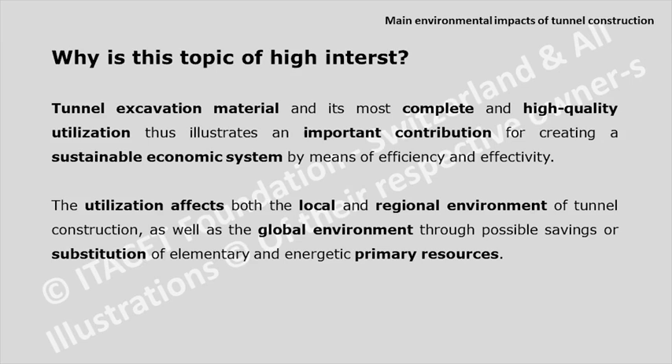Tunnel excavation material in its most complete and high-quality utilization represents an important contribution to a sustainable economic system by means of efficiency and also effectiveness. The utilization affects both the local and regional environment, but also the global environment. Of course, we could try to reuse most of the material on site, but it's not always possible. But we should try to reuse the materials for the industry as close as possible, or on the construction site, and thus substitute other primary resources which we have to dig for in mining, for producing, for example, the concrete on the construction site.

Construction engineering, by the way, is the most important sector with regard to economy and ecology. It has a substantial part in the GDP of the countries. Its contribution to the global warming potential is about 1/3. It requires about 40% of the global energy, and it contributes to the waste stream with about 50%. So these are quite high numbers. It's just the construction industry.

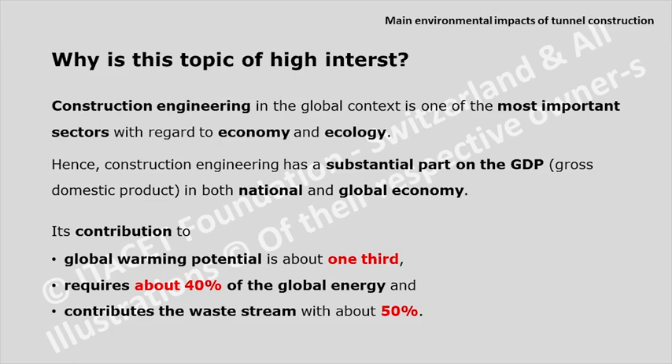What I would like to show you is some important worldwide developments, and I start with the population. You see, in 1750, we were not even 1 billion, now we are more than 6. Water use, we have the numbers from the 1900s to the year 2000. You see a multiplication by several factors in the water use. Let's see the urban population.

What we see in all Europe, maybe also here in South America, is that the urban population rises and leaves the countryside, which ends up in really difficult situations in the cities, because we have pretty small cities. Our biggest city is Vienna with about 1.8 million, but it gets 100,000 people every year, and the infrastructure is not prepared for that. And all the other cities have the same problem. Paper consumption is just one other example, or restaurants. The number of restaurants is rising a lot worldwide, as you see.

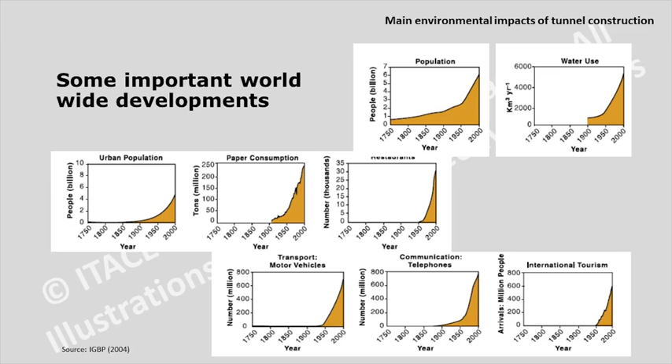Transport, motor vehicles: the numbers start in 1950 and go to the year 2000. You see the rise in these motor vehicles. They all need energy, of course. They all need primary resources. Or, for example, communication, the telephones, the mobiles. Everybody has a mobile nowadays. International tourism has risen dramatically, and thus needs a lot of energy. This ends up in a global warming potential.

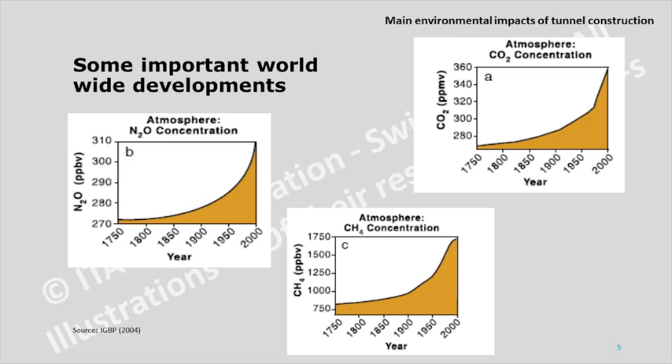With all of these developments we see worldwide, the CO2 production in the last years is really rising, and we had a goal to reach a certain limit of this CO2. For example, Austria doesn't meet these requirements, so we have to change something in the country to fulfill the requirements which were legally fixed. For the moment, we are completely off target on CO2 production. The same for nitrogen, the same for other materials. I just brought 3 slides with me. You see, all these numbers are rising a lot. So we have to change something if we would like to go down with these climate change issues.

We tried to figure out who on this globe is the main consumer of energy. What you see is the energy consumption per capita. And you see Northern America consumes the most, almost double that of Europe.

I also put in Latin America. You see, you are not using too much energy compared to Northern America or to other parts of this world.

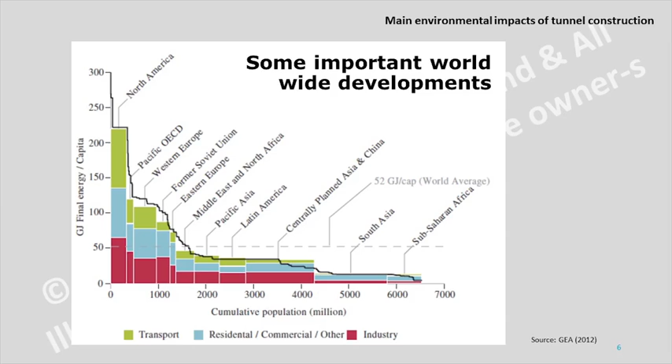This ends up in completely different CO2 productions, just to mention one of these global warming potential factors. Let's see the global contribution of the construction sector to the environment. I already mentioned one third of CO2 emissions come from the construction industry. 40% of the world's energy consumption goes to construction. 25% of water consumption goes to construction. 40% of resource consumption goes to construction, and 60% of electricity consumption also goes to the construction industry. So if we change something in the construction industry, we can really save resources. That's what I wanted to show with this slide.

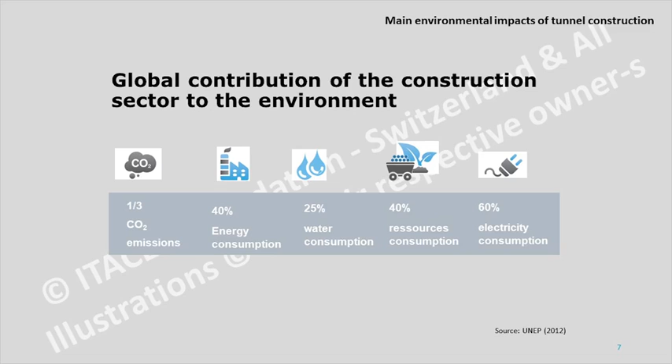The other factor is that 80% of the world's population will live in cities by 2030. Because we see a mainstream trend, being a farmer, for example in Europe, is not a very attractive job, so everybody thinks living in the city is much better than on the countryside. This will need a lot of underground structures in these cities, needing a lot of mineral resources.

40% of the world's population need new buildings. I don't know if you follow what is going on in Europe - Austria is mainly concerned with these streams coming up from northern Africa through Austria. Most of them would like to go to Germany, but the border is closed now, so many of them end up in Austria because they are not allowed to go to Germany. We have no buildings for them.

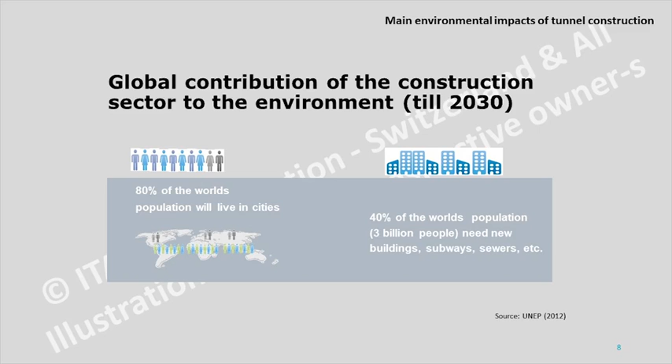So our parking garages are full of people, sleeping there because there is no housing available at the moment. So we need buildings, we need subways, we need sewers and all of that.

We have to think about the processes in life cycles. First of all, we have primary resources, that's clear. Out of these primary resources, we produce our materials, and these materials then go to the construction site.

To the tunnel - if we are not reusing the material directly on the construction site, we will need extra lorries coming from the mining sites, bringing new fresh material. Or if we don't use this material on the construction site, we have to deposit it. We have to go kilometers with our excavated material, producing CO2 every kilometer, along with all the other materials.

When we operate the tunnel, most clients would like to see 100 years of lifetime for a tunnel, very popular now. The Brenner Base has 150. There are coming up projects with 200 years of lifetime. I don't know how to check that, but it is written in the contract - lifetime must be at least 100 years.

And then we have to think about recycling - what do we do when the houses, when the tunnels, are reaching the end of lifetime? By the way, most tunnels have to be repaired after 30 years. That's what we see, that's the reality. But however, the contract says 100 years.

So when we design and build these tunnels, we should think about how to recycle these products which we used in the houses and also in the tunnels, and hopefully only a very small stream then ends up at the deposit. The recycling has to be developed in a way that we can use all these materials again for the construction industry.

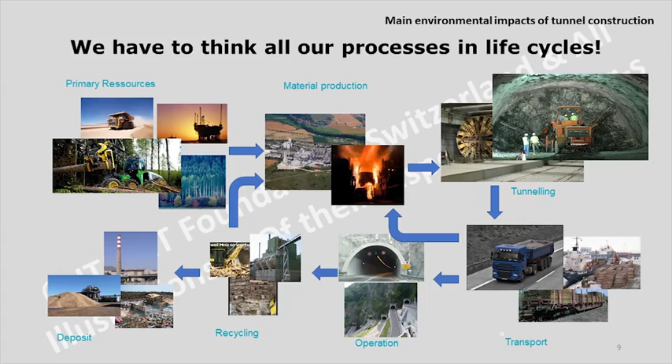You may say there's lots of materials available, mineral resources. I mean, there are mineral resources, lots available in the world, but the distance you can transport them is very limited. For example, Vienna has the problem - as we have a lack of mineral resources in Austria, we are now buying our mineral resources from the Czech Republic.

But the distance gets quite high. So at the end, the colleagues who are living in the houses have to pay more for renting the house, because it was much more expensive to build the house since the mineral resource came from another nation. So this we should consider when we design and build our things.

I just wanted to show it in another way. So first we have raw materials, then we manufacture them, we distribute them, we use them, and we dispose of them. And at the same time, we should think about the environmental impacts.

Is it possible to renew the materials which we use in the construction industry? We should think about the choice of technology for extracting the raw material. If we build a tunnel with a tunnel boring machine, for example, there is nothing added to the material, so why should this material be waste? If we do drill and blast, we are quite comparable with the mining industry, so why should this material which we dig out be waste?

When we manufacture and distribute, how will this product get to the customers? We should think about that. We should calculate the CO2 production of construction. How much energy will the product use? What happens when the product is finished? And how will it be disposed of? Are there disposal areas available, by the way?

In small countries, there are not so many disposal areas where the people living there are allowed to go. It's just, for the moment, a matter of legal ranges, that one is higher than the other. And even if the population doesn't think it's a good idea to make a deposit there, the legal requirement says it doesn't matter what the population said, we need that land and therefore we take it. But how long can we continue in that way?

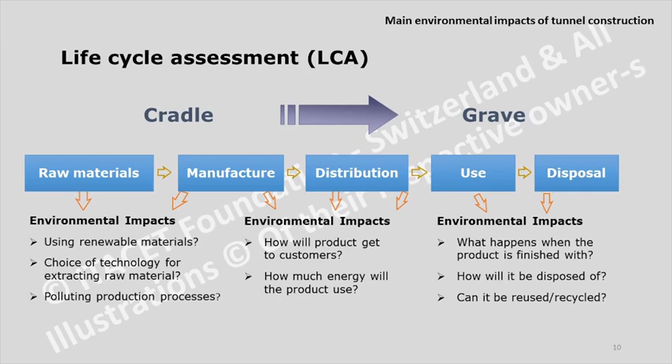1994, many things changed because we got the environmental impact law. It changed in a way that every project, every tunnel project, had to go through an environmental impact study. So, for example, besides this Brenner Base Tunnel, we are now building two quite big tunnels.

One is the Semmering, which is 27 kilometers long with 2 tubes. The other is the Koralm tunnel, which is 33 kilometers with 2 tubes. And we had to do an environmental impact study for that.

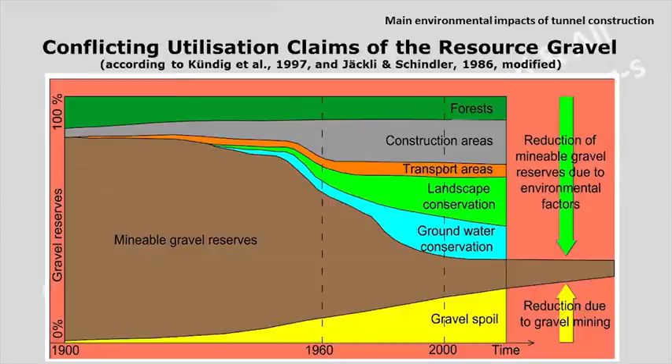But the situation changed dramatically. Before 1994, we had nothing considered in that way. No tunnel engineer, when I was a student, we didn't hear anything about that. We were the tunnel engineers and we said, okay, the tunnel has to be built there and that's it. And all the others who claimed something, we ignored more or less before 1994.

In 1994, the situation changed. An environmental impact study had to be done, and we had to have checkers from that side. So there's one ethologist watching what the birds are doing. There's one from the fishery. There's one for the plants. There's one for the trees, and many more.

At the Semmering Base Tunnel, the situation collapsed a bit because there were 56 experts and only 10 technicians. The rest came from the environmental side. And you can imagine it's quite hard to bring a project through if you have about 40 experts on the environmental side and just about 10 working on rock mechanics and tunneling issues.

So we have to bring it back a bit so that the technicians and the environmental impact people are, let's say, half and half. For the moment, the situation is still the other way round. So it takes many, many years to bring a project through. What we learned from that is if a project takes about 10 years for realization in the construction stage, it takes about 10 years for the preparation. So this is the change because of this fact.

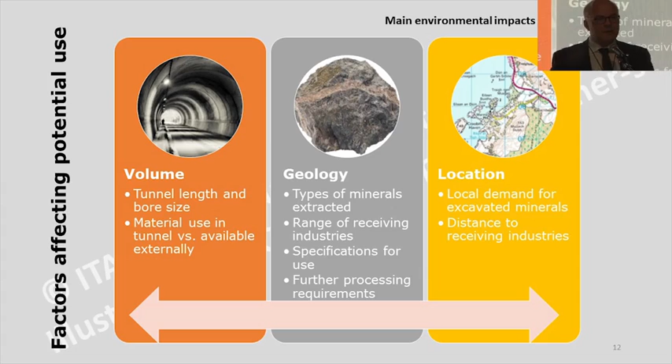Then the location, of course, is important - the distance to reach the industry. If this distance is too far, then it will not be worth it from the economical point of view to transport it there.

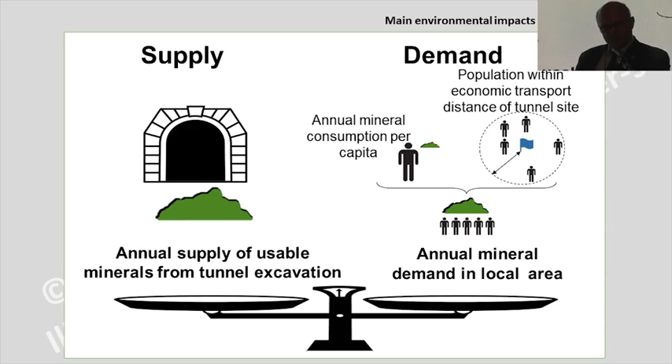So on one hand, we have a supply which comes out of the tunnel, which we could deliver, which we could sell. I say we could sell because all the industry knows that we have to pay to get rid of the waste - tunnel excavation material is a waste by law, so we have to pay for getting rid of this waste. All the industry knows that, so the industry tells us for the moment, okay, how much do you pay if we take your mineral resources? A little bit of a ridiculous situation.

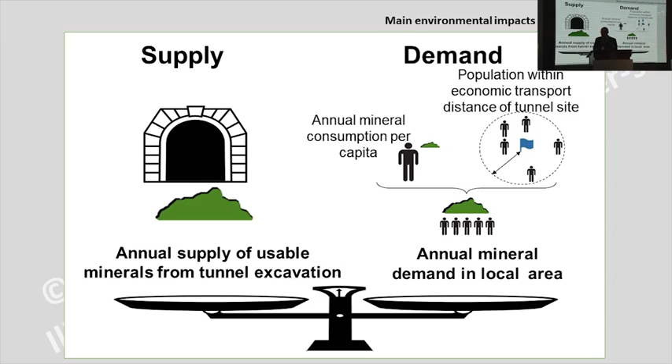On the other side, we have the demand, of course. We have a population who needs a specific demand, and I already mentioned the transport distance is of interest.

The goal which we have is that on construction sites we set up processing units, like the mining industry has. And if the tunnel is too small or too short, whatever it is, we have to find a partner from the minerals industry to give them the material to make a product out of it, so that the disposal site gets to zero. This is the major goal.

For example, in Vienna, we are digging metros. We are in a clay situation, and the mines around Vienna are producing bricks out of that material. So what we checked was the chemical and mineralogical composition of the material coming out from the metro in Vienna. What we saw is it fits 100% to the requirement of the mining industry, who is digging out the same material in open pits and producing bricks out of it.

So why not deliver the material from the metro in Vienna directly to these mining companies? But it's forbidden, legally forbidden for the moment. And if we do that, we have to pay a lot of money to the mining companies. They have big fun with us.

The other situation, the easier way, is we deposit it. So we bring this material out of Vienna and fill up or make deposits around Vienna. But truly spoken, this is a secondary resource that people in 30 years will know about - the bricks material lies down there on this deposit because they dug it out from the metro. The legal situation in Europe was a little bit funny at that time, let's say 2017. In 30 years, people will say, now let's mine these secondary resources because it's the best material.

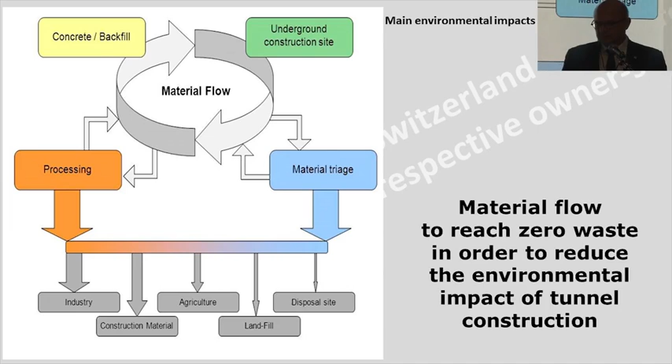Why not? So our big goal must be to get the disposal sites down to zero. So for miners, very clear, what should we learn? We should learn how to crush it, how to wash it, how to grade it directly on the construction site if possible, and then bring it to the industry. And please, let's change the law in this way.

It cannot be so hard to change a law, because it was written by the generation of us that we have this law - the law has existed in Europe since 2002. So there must be existing lawyers who wrote this law.

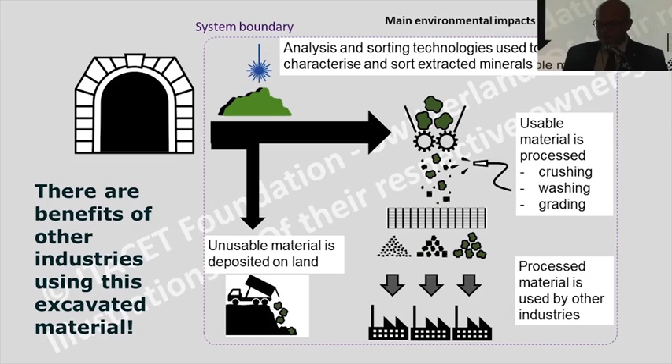What we don't do in European projects is - there is no requirement to do these global warming potential studies. I have a lot of other parameters written down there: ozone depletion, primary energy demand, eutrophication. All these are parameters which the construction industry is not used to for the moment. So the environmental impact study which is required does not include studies on that. But if we would start with these studies, we would immediately see, okay, we are producing so much CO2, for example. But there are many other parameters which we should take into account.

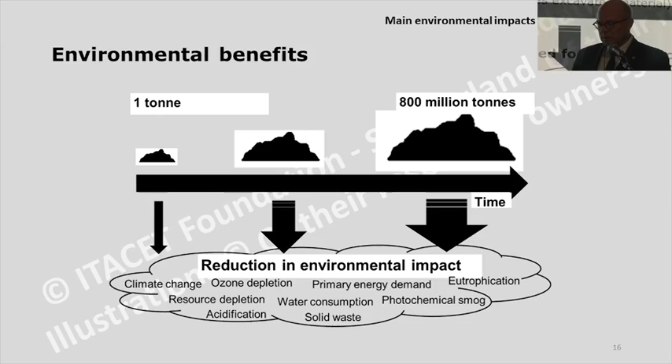We did 3 studies in a European project where we checked a project situated on the French side of Switzerland, I think it is Les Farettes. They produce 135,000 tons of excavated material. Then Nant de Drance is a powerhouse project in Switzerland - they produce 4.6 million tons. And then a very famous project, Lyon-Turin - Michel will know that perfectly - a very long tunnel like the Brenner Base Tunnel, but connecting France with Italy, producing about 28 million tons of excavation material.

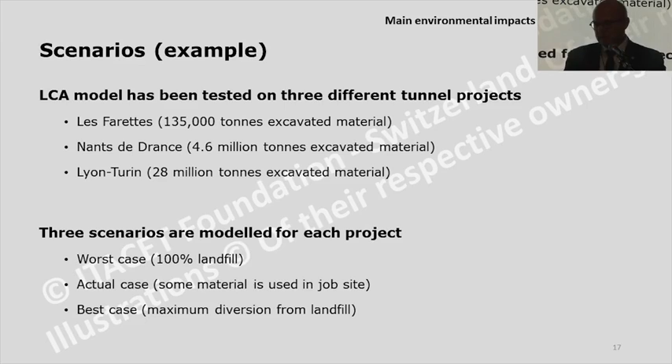And these scenarios that we studied were: worst case, we bring all to landfill, 100%. Actual case - what are they thinking on, or what are they doing? Because Nant de Drance is already finished, I would say, from the excavation point of view. Or in the best case, we are really using this material and not landfilling it.

And then we figured out what is the CO2 production, just to get into one parameter. If we do that with Les Farettes, you see we have about 5 kilograms of CO2 per ton of mineral resources which we get out. In the actual case, because Les Farettes really reused the material in the best way I would say, they saved CO2. The same for Nant de Drance.

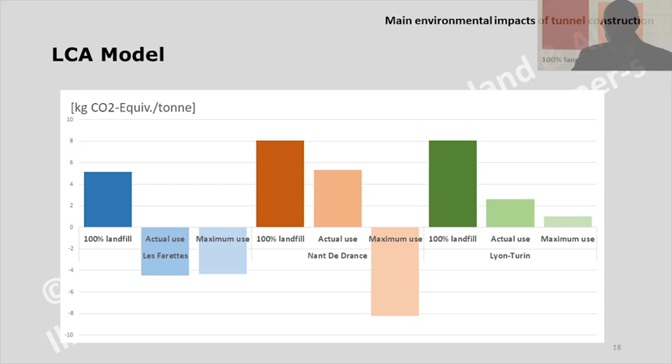If we do landfilling with all the material, we have 8 kilograms of CO2 per ton. In the maximum case, if we could reuse this material - because it's in the middle of the Alps, and powerhouses are always situated in a perfect rock mechanics situation - if we reuse all of that, then we would save a lot of CO2. The problem is Nant de Drance is situated in the middle of the Alps and the industry is not sitting up there. This is the problem. Lyon-Turin, 100% landfill, would cause also about 8 kilograms per ton. In the maximum use it would be down to about 1 kilogram per ton.

If we do construction works, it must be clear that we are influencing the environment. I don't want to run through all these points shown on this slide, but of course we are limiting the mobility of the animals because of the tracks which we are setting up. We are reducing the habitat areas because of the construction.

We will cause vibrations, we will cause warming, because the locomotives and cars bring warming to that area. We are also bringing noise to the landscape. We are changing the electromagnetic fields. We are changing the groundwater levels. All these things we should now really start to consider.

Everybody will say, yeah, when you change the environment in such a way, why do you build something? What we have to do now is say, okay, what happens in this area if we build nothing? Compared to the situation from the environmental point of view, what happens if we build something? We should do a prognosis for the next 10, 15, 20, 50 years if possible, and then show the environmental guys what happens if we don't do something.

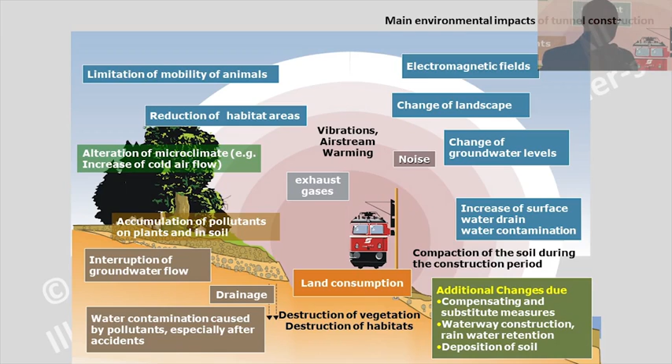Just to be clear, yes, we are changing the environment a lot. This must be clear to all of us. These were the points which we didn't consider before 1994, because we said we build a route, and everybody should be happy if we build a tunnel here or there.

Martin and myself, we have a boss - I had a boss in Salzburg from a generation not used to this. He often followed me in meetings for the Brenner Base Tunnel, where we started to live what I show here. We, from the technical point of view, say we need transport, we need technology, but the others coming in bring the requirements from the environment. The older generation doesn't accept that - they think the environmental guys are stupid, tell me what I should do and I will maybe consider it in my technical design.

I made the boxes the same size because nowadays the environmental guys should be considered with the same importance as the technical side. Normally it is a technician who is the project leader, and he should have a feeling for the environmental colleagues, not just say 'out of interest, what you're saying.' Because we get stuck at the ministry, which wants experts looking over our project, and if they say no, then it's a no. The best tunnel design has no chance if you do not consider the environmental guys.

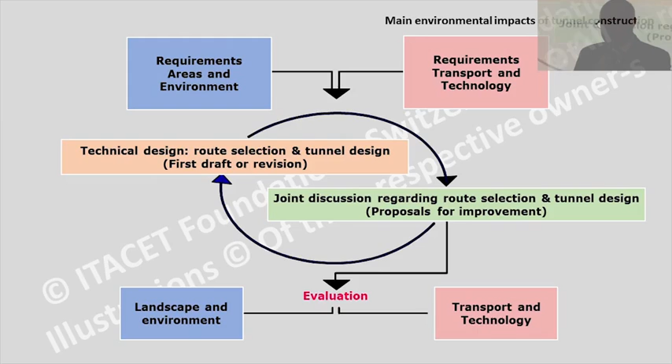The structure of our environmental impact studies in Europe is like that: summary and overview of the measures, what do we do, project justification and alternatives. Then we always start with tunnel operation - why do we need this tunnel for the operation? Then, of course, a description of the construction phase. But the construction phase is limited - for example, the Brenner Base Tunnel will have a construction duration of about 15 years. So people living there know that after 15 years we are gone, and then the operation starts.

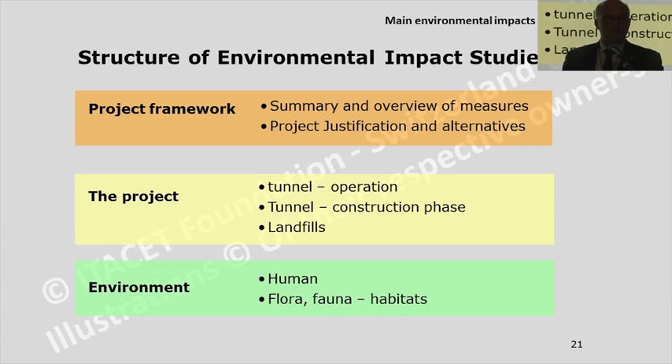That's why the operation will run for the next 100 years or even longer. And then the question for the landfills: where will we put the landfills and how can we reach these landfills? And of course, there are many factors. I just wrote 2 lines on it. Humans have to be considered. What is the influence on the humans because of this construction? What is the influence on the flora, the fauna, and all those? There are many guidelines from the European Union to be followed nowadays.

And the environmental guys, by the way, they work in the same structured way as we as tunnel engineers. We have our clear structure how we design this tunnel and how we go from the design to the construction. It's very clearly structured. But the environmental guys nowadays do the same. They say clearly, what is your impact on my environment? Is it a sensitive area, yes or no? And what is the effect because of your construction? And then they sort out what is your relevance and they categorize you. And if you go down to number 6 with the relevance of your project, you will have a really hard life. And then you come up and say, okay, I do this and that measures.

Some countries do it in that way that they pay the environmental guys a certain amount of money and say, this is my measure, you get the money. This is not the way which we can go in future. The effectiveness of measures ranges from very good to moderate, but there will be a rest of influence on the environment. There will be something which is still there, even if you do your best in measures. And this is the essential result: what is the residual load on the environment because of your project?

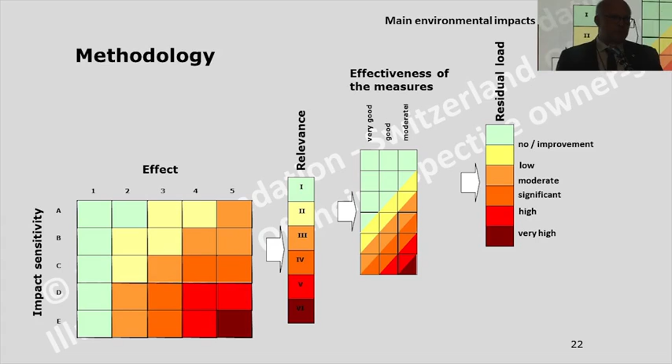So, for example, you have a tunnel, and after the tunnel you set some walls for noise protection for the houses which are behind. This is then a measure, but still the people living behind this wall will hear something. There will be a small rest of noise still there. You shouldn't come up very high after all the measures which you set in your project. This is the way the environmental guys are working together with us.

Because I was speaking about the excavated material, the reason why we are not allowed to give it to the industry immediately is that the law says you are polluting the mineral resources. Yes, the tunnel engineers are polluting the mineral resources a bit because they fill in plastics or other things which are brought into this mineral resource, but the point is the mining industry does the same. And we are checked by these ministries and the mining industry is not. If we checked the mining industry for the same parameters as we tunnel engineers are checked, the problem would be that you cannot sell anything anymore, because it would come out that the mining industry also pollutes their material, so you buy a kind of waste.

So we have to be on the same level. Either we are waste or we are a product. But it must be the same as what the mining industry does. This is what we are fighting for in Brussels.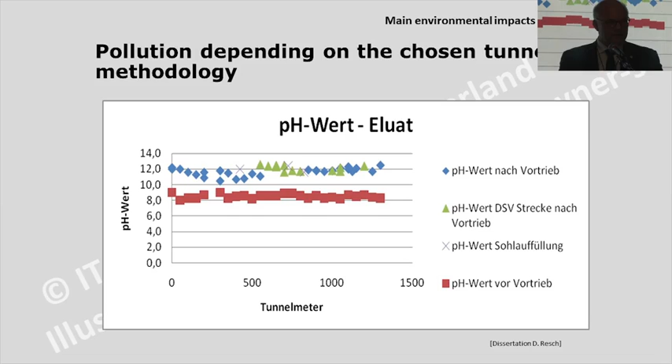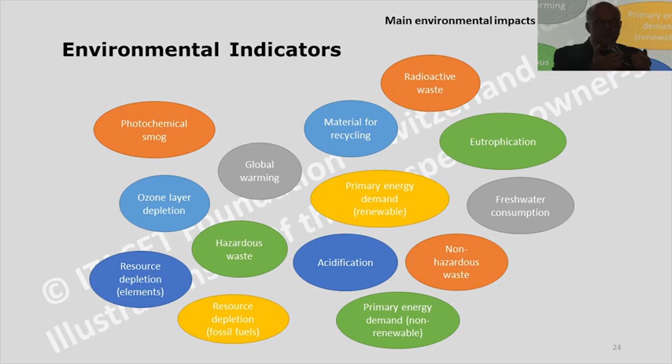Okay, environmental indicators, I don't want to run through. I'm pretty sure you have the slides available. The global warming potential is always the one which is in the media, in the newspaper, but there are many others which have to be considered. And what we would like to see is that environmental impact studies consider all these factors, which can be clearly calculated. And when we end up there, we will see that the construction industry will try to save resources that way.

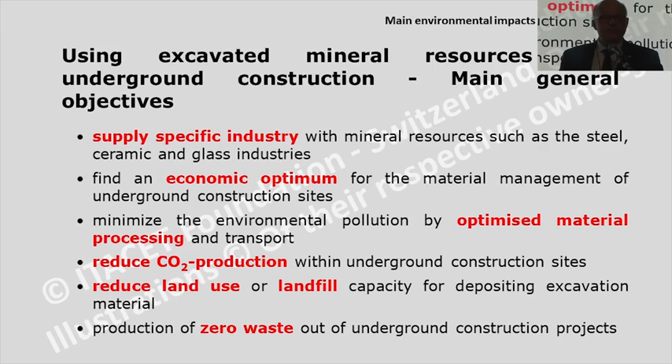So my summary is: supply the specific industry with mineral resources, such as steel, ceramics. I will come back to that a little bit later in another talk. Find an economic optimum for the material management on the underground construction sites. Minimize the environmental pollution by optimized material processing and transport. Reduce the CO2 production, but it is not only CO2, there are many more factors which have to be considered. Reduce the land use or landfill capacity for depositing excavation material. At the end, produce zero waste. This would be a wish for all the construction industry. That was my short introduction to this topic.